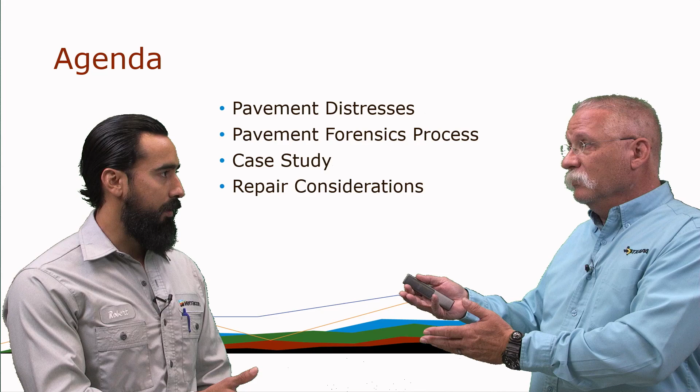The first thing I want to talk about is, anytime there's a pavement distress or you get asked to go do a forensics investigation, what do you do? You see a distress in the pavement, and it's easy for people to point out the hot mix, right, because it's at the surface. But we need to talk a little bit about the different pavement distresses, and then we can talk about the pavement forensics process.

I'm going to bring up a brief case study, and then at the end we can talk about the repair considerations. Awesome, let's get started.

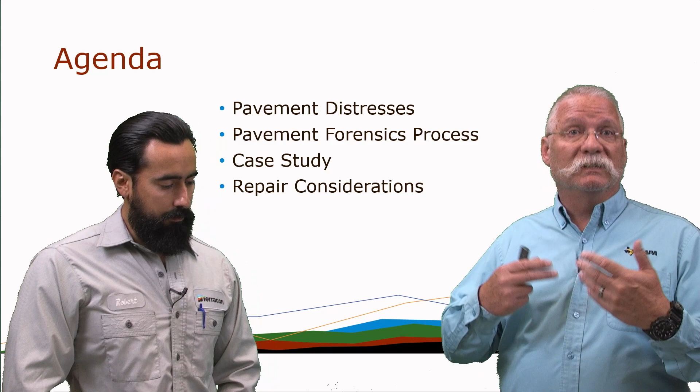And then sometimes, as I mentioned, it could be a volume change, or it could be a construction joint. As you mentioned earlier, sometimes we're trying to look for that smoking gun, but many times it's just several reasons. And to me, I think the key thing is to list them all out - list what you think could all be the issues. Then you start kicking stuff out, and you start looking at interactions - well, if this happened, this could happen.

Yes, and if my water was getting into the base, that could happen as well. As you start to define that out, you've got to start everything. One of the things I always look at, I start from right-of-way and look at everything that potentially could contribute to the issue. Whether I think it's an issue or not, I want to make a note of it. And then whether I'm out here on boots on the ground, or just looking at a photo like we are right now, I always look at the ditch.

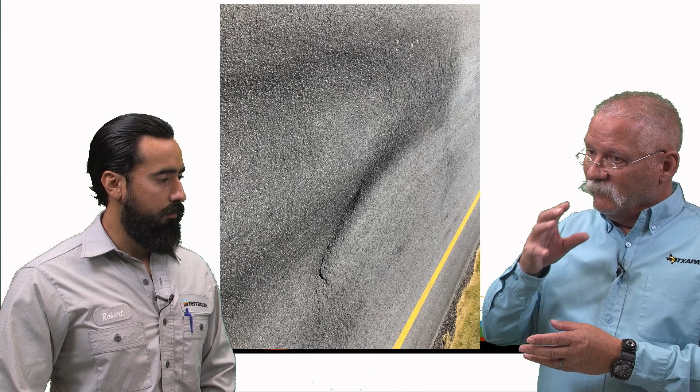Absolutely, and that's a big deal. TxDOT is looking at a shear bond strength test, trying to evaluate that—actually take a core through the pavement, then shear it right at the interface and measure the strength of that interface. They're still trying to figure out what that number needs to be. But we know there are very high shear stresses just a couple inches down, and if we put that high shear stress right at an interface, and we don't do a good job with that interface, then potentially that pavement isn't acting as one—it's acting as independent layers, and they're not going to be near as strong as if the whole thing acted as one.

So show me here what we've got. I wanted to bring up this picture because there's a couple of things going on. In general, this is stripping, but if you look over here, originally there was a crack right through here, and then it was sealed—you can see the seal coat right there. First of all, we need to be proactive with maintenance: as soon as we see a crack, seal it as soon as you can, because otherwise water gets in and you see the stripping issue right here. Once water gets into your pavement, it can cause all kinds of damage—it could be in your hot mix, or if it goes deeper, it can be in the base or the subgrade.

The next thing I want to talk about is once we get to that time where we have to do something about it. Say you've got your scheduled 2-inch mill and fill. Where are we placing that overlay on top of? Right on top of the failed section. We really need to be probably down here somewhere to resolve that issue.

So what may be in the book as the standard operating procedure, we still need to go out and put eyes on this, cut some holes, and take a look at what's going on. If the issue is deeper than what the book or standard practice says, we've got to think about this, because just taking off this 2 inches and putting 2 inches back, it's going to fail in a very short period of time. And now we've wasted even more money, more resources.

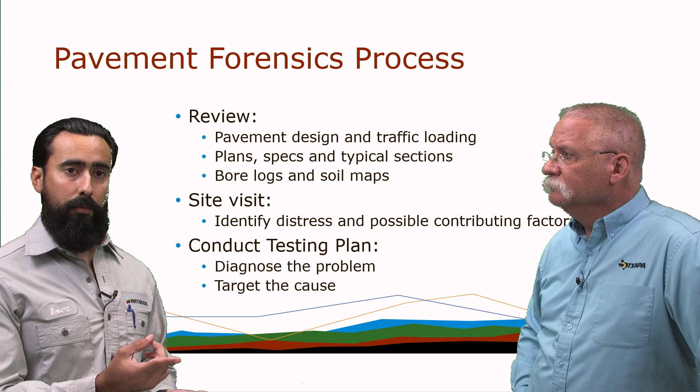There are 3 steps, and as you mentioned earlier, we need to diagnose. But first, starting with the review, there's 3 things we like to look at. The first is, is there a pavement design, an original pavement design, and an original traffic projection? Then any available plan specifications and typical sections. So if we have X number of inches of base, X number of inches of hot mix, we need to know that information before we go out there and validate what is out there. And then any available bore log soil maps, we need to make sure we know what we're sitting on top of. We have clay versus silt versus sand.

We need to know what we're sitting on top of. So if you know what's supposed to be there, then you go out and do some investigation, you can evaluate: here's what it was supposed to be, and here's what's actual. And if they're not the same, that's going to give you an indication of maybe that's why you're out there. We're after validating. This is what we have. What do we actually have?

I think the one other thing I'm glad you brought up, and we mentioned it already, is looking at the traffic loading. What was that original pavement design? Was it a 20-year design? Was it 3 million, 8 million, 10 million, 20 million?

We're seeing pavements now that have got 40, 60, 80, or 100 million ESALs on roads. So what's happened to that roadway in the last 10, 15, 20, 30 years? Have we just worn it out? It gets stressed, and eventually it gets too stressed and may just crack because it's not designed to carry that level of load anymore. I look at the amount of traffic increase all over the state. It's a challenge. We gotta be realists about it.

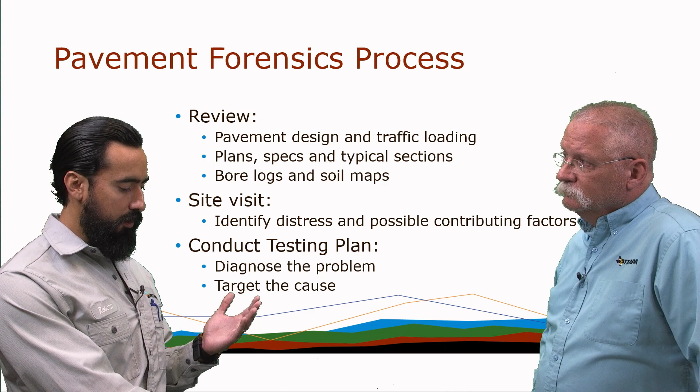So then you're going to go out on the site. Now that we have an idea of what we're dealing with, let's put some boots on the ground. And you mentioned earlier, let's look right-of-way and see if there's - you make up your list and start writing all the possible causes, and then based on that you diagnose the problem. Okay, I got the distress, I know approximately - I could tell maybe this is the cause, and then you go back to the drawing board and use your available tools to go out there and validate. So you need to diagnose the problem, targeting the cause, so you know how to fix it. Yeah, perfect, that makes perfect sense.

It's not a one size fits all, right? Well, the book says I gotta do this - well, it may not be that at all. If it says 2-inch mill and fill, you may need 4, you may need 1, or you may just need an overlay - just depending on what's going on and how well that pavement was constructed. We're getting better quality with our mixes every year, but we still have challenges moving ahead.

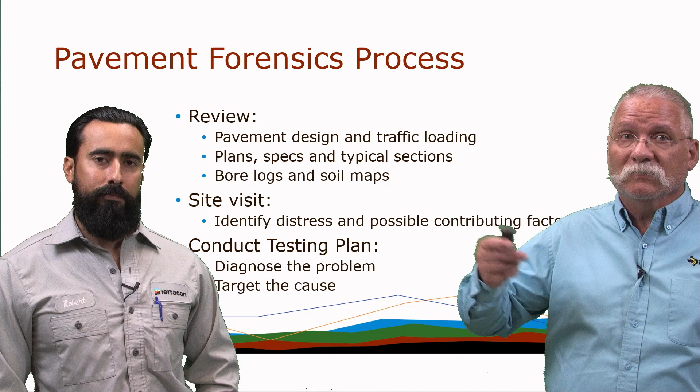So we've got FWD here - explain how this works. When we talk about the pavement forensics process, we have many available tools, and there's a few I like to use. One of them is FWD. So what you have is a trailer, a falling weight deflectometer. You have a load, it's a 9,000 pound load, going right back underneath right there. And you have a set of sensors sitting directly on top of the pavement. You pick up the load, drop it, and then you measure that pavement response. So that's just a quick indicator - W1, the first sensor, gives you an idea.

It's directly under right there, yes, that sensor gives you an indication of overall stiffness of that pavement. So that sensor alone, you can see consistency, and then when it goes up, something's going on.

Maybe that's the place where I need to look. Is there distress? What's happening there? And this is a quick, fast indicator. You drop it, maybe a minute per drop, and then you can do a number of drops over the pavement, and then you can go back and review. Now I have an idea of what the pavement is doing. Maybe I need to narrow down in this particular section.

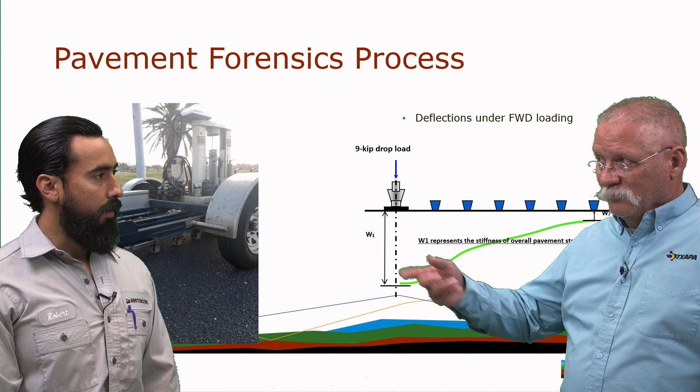Sometimes you can say okay, 80% of the roadway is fine, but I have a few sections where I need to look and see what the problem is, because it could be that you have two different types of repairs for that same roadway. And that's where you're going to get into your next steps.

Dynamic cone penetrometer. So now that you evaluate the roadway with the FWD, maybe you pick a control section where you know there's no distress, the deflection is what you expect, and then you see another location where you have a little bit of distress, the deflection goes up, and then you use this tool.

In this case, we like to drill a core and see how much hot mix we have. It's wet coring, so you wouldn't want moisture to affect the base, so we go a few inches and then drill an access hole to the top of the base, run the DCP, and you can just drop it down to get a stiffness in the hole, starting from the top of the base, but you've not damaged it with moisture.

You just take a shop vac and suck all the dirt out of it, something like that. With the hammer drill, we just drill the hole, and then right there we start running the DCP on top of the base, and then we start measuring the stiffness profile of the base and the subgrade.

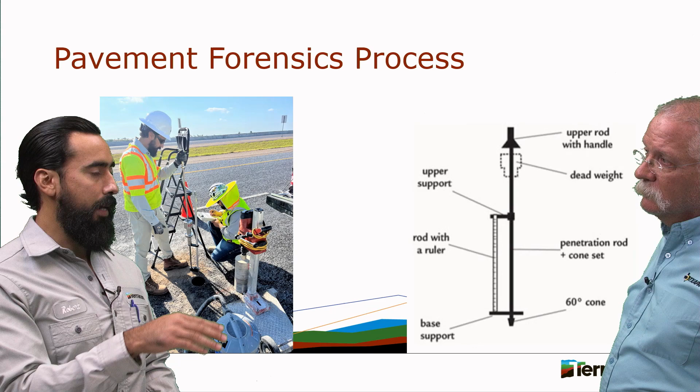You can estimate the base thickness, and then if there's a stabilized layer, sometimes you see that stiffness profile change very quickly. It probably takes longer to drill a hole than it does to run the test. If it's very stiff, it'll take a minute, but if it's soft, it'll go pretty quick.

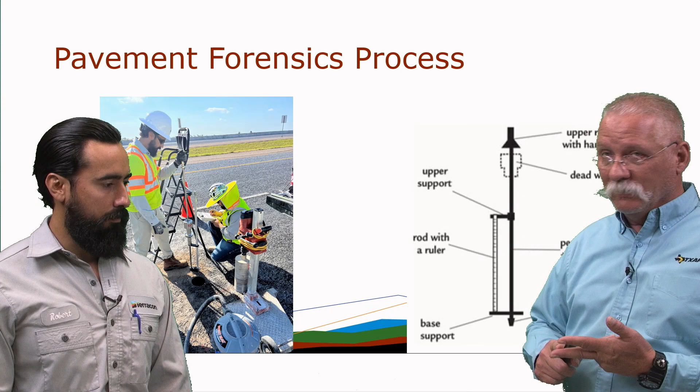So we got the FWD, the dynamic cone penetrometer, the DCP, and then we got good old coring. We're going to burn a hole in the pavement and see what it looks like. It's going to give us a sample of the mix.

And again, you showed that one core that had the stripping, it was very evident that there was a problem in that situation. But then we've got, what are we doing here, are you looking at the crack, are you crack mapping in this?

Yeah, we usually like to, once we drill a control, now we move on to a section like this where you have the distress, drill it, and then log it. I have inches of hot mix, it's this much thick, and then does the crack go through the hot mix, and we make our notes and then document it with a picture.

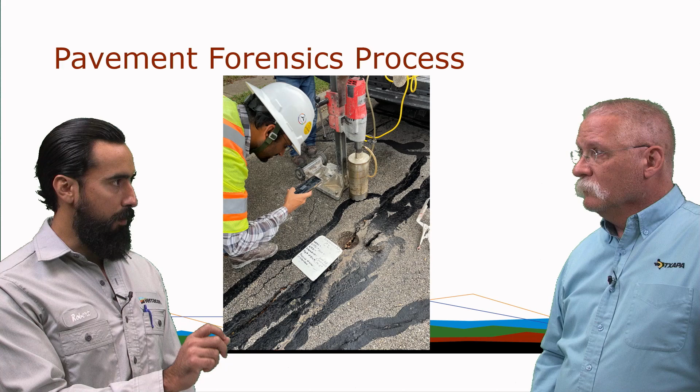Well, looks good. So then when you get back, then you've got all this stuff to look at. Now we know the tools, and TxDOT, when they do pavement design, they go off of the TxDOT pavement manual, and there's design values, or typical design modulus values for each of the layers.

Starting from the ground up, your subgrade should be between 8 to 20 KSI. Sometimes it's weaker than that, and then if you have a stabilized layer, that range is 30 to 45. Usually, if there's no stabilized layer and you have flex base on top of the subgrade, then that flex base is going to be affected by the subgrade.

If you have a weak subgrade, your base may not be as stiff, you can't use as strong a number. Usually that range is between 3 to 4 for your subgrade modulus, for the flexible base. So if your modulus is 10 KSI, you could then do 30 to 40, in that range.

And then obviously, this is all mix dependent. Different mixes have got different modulus. And so you've got what's in the pavement manual, and the Superpave is stronger than the dense graded. SMA and Superpave use the same set of moduluses.

And as the thickness of the layer goes up, you actually can increase modulus because it's now working kind of like what you're talking about down here. It's all working together a little bit better.

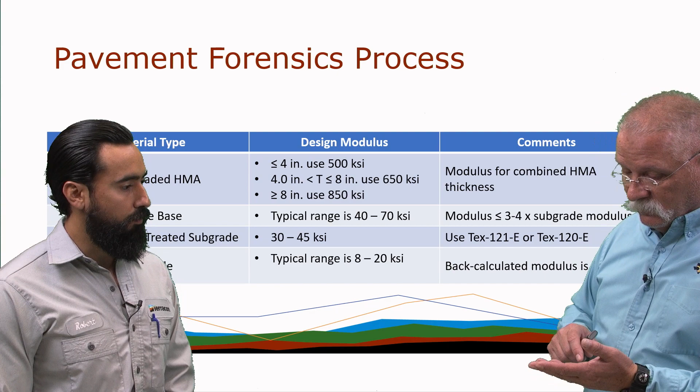So being a consultant, if you're working in Austin or down in Pharr, you've got to make sure you check the local SOP as well when you're putting your designs together, make sure they're kind of in concert within what range they want locally. Yes, that's the thing we do, we talk to the districts.

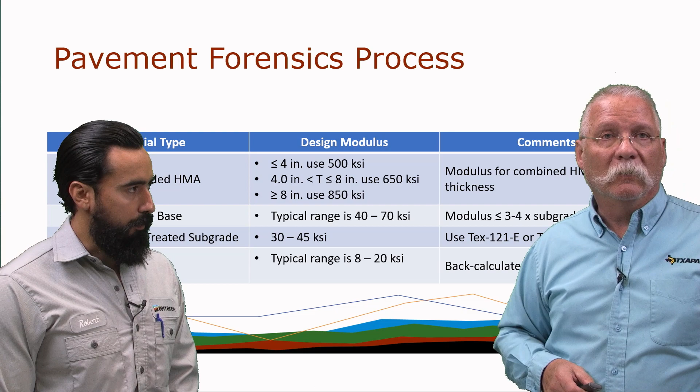Good deal. All right, so walk me through here. One of the things now that we've talked about FWD as a tool and typical values we use for design, there's a tool in FPS, it's the stress analysis tool. So what we can do with this tool is you get essentially a typical section. You say, okay, my subgrade is 8 KSI, then you got a lime treated layer, a flexible base, and a hot mix. Once you assign the thickness and the modulus value, then you can simulate what that deflection bowl is going to be. For this particular section, that deflection is approximately 17 mils.

So it's just a quick indicator. If I have a pavement that the plans say is this thick, I do the simulation, I'm going to expect 17 mils. So once you go out there, run FWD, you can see that consistency, okay, it's 17, 18, but when it doubles? You want 17 and you're getting 40, then what's going on?

Or sometimes it's lower, maybe we run into a full hot mix layer. Now that deflection is lower, but you got to look for certain things, not only what you expect, but the low and the high deflection, and then that's how you can target different ranges to see what's going on.

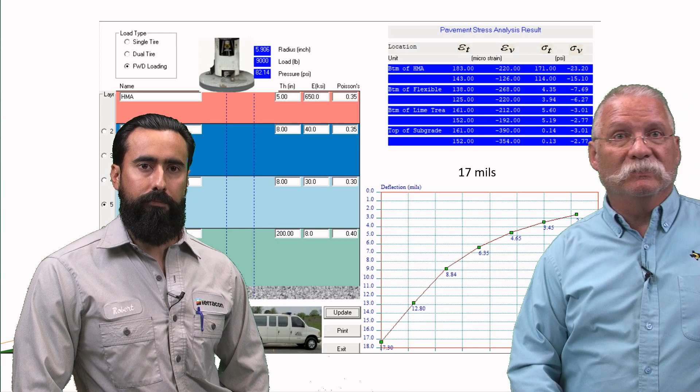That makes sense to you guys? Hopefully. So then you could go back and, if one of these was significantly different, or if you do some additional work, you find out that layer wasn't 5 inches thick, that's a great point. You can do that simulation and go out there as well, and hey, it was actually 7 inches thick or 4 inches thick. You'd go, well, that should change this deflection, right?

So then, the way I look at it, there ought to be a reason for the number. There ought to be some science that tells you. If you can evaluate those different lifts and the different materials, it ought to make sense. And if it doesn't make sense, then maybe one of my assumptions is off. Maybe they said it's got 12 inches of flex base, I'm not going to take your word for it, and then you go out and you go, well, this doesn't make sense.

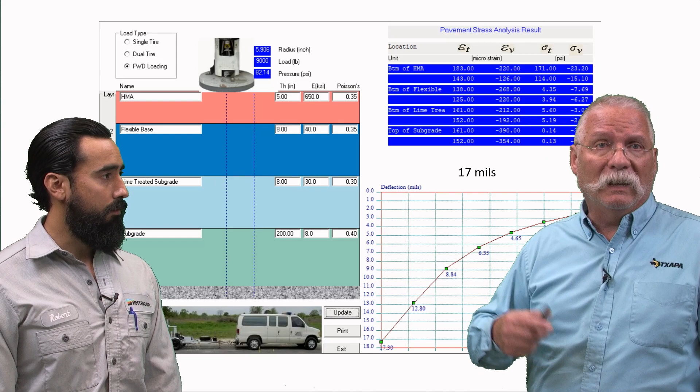You go out and there's 8 inches of flex base or something else like that, and you kind of go, well, okay, now I see why. Now I see why. Okay, that makes sense.

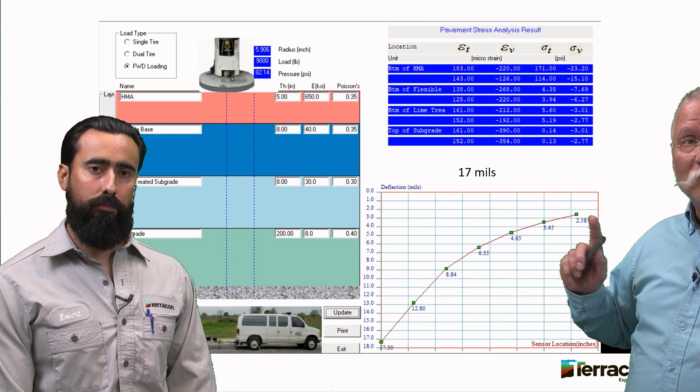So in FPS 21, you've got a stress analysis tool. If you're not using it, it's out there, you can use it, and you can go through and plug this in. I know I'm going to call you a pavement design geek, but with love, I know the shape, even the shape of this curve makes a difference in getting into the details there.

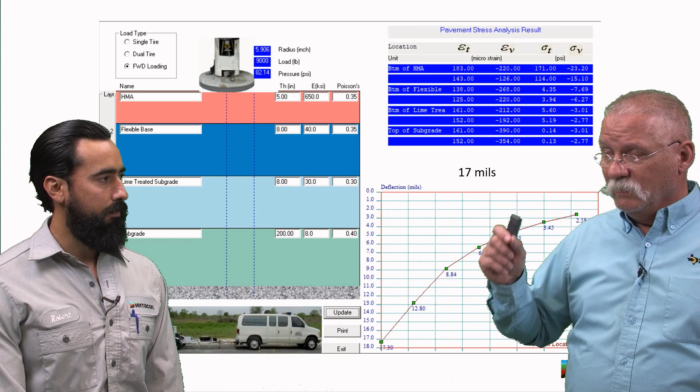So now we've got, this looks like we've got a pavement that you've actually done some testing on. This is your results. Yes.

So as we mentioned, now that I expect this deflection, I go out there, I set my control. I want to see what that looks like. And what you have right here is just an example of the way I like to plot that DCP.

So I plot it in layers, starting right here. That's the bottom of the hot mix, or top of the base. About 7 inches of asphalt. And now we're testing below that.

You start dropping the hammer and start measuring that stiffness profile, and then you see a change right there. That's when you hit your stabilized subgrade layer, and then right here, that's where you hit that natural subgrade. So for this one, there's formulas in the pavement design manual.

Boom, boom, boom, and then go like that, and then you're kind of in a new layer, then boom, boom, boom, and then it'll drop some more. And it'll tell you, obviously you can measure thickness as well, and also measuring that strength of that material.

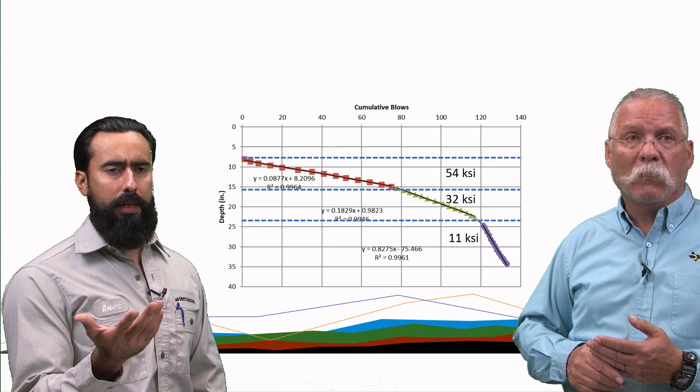You estimate the stiffness, so that helps, right? You line this up. And sometimes, that's where you mentioned it earlier, so are we missing a layer? Are we missing thickness? This is a quick indicator of where the problem is.

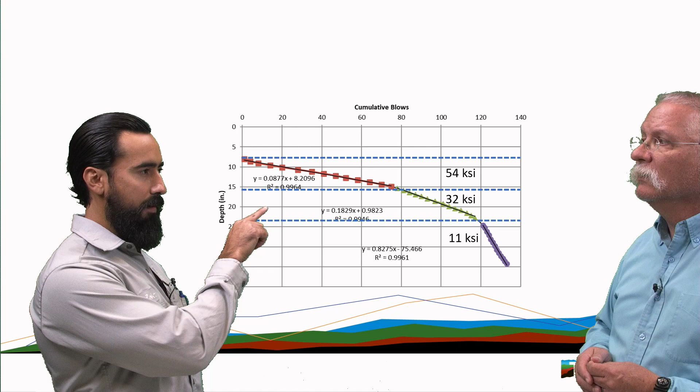Sometimes you do forensics on a cracked pavement, you get the moisture in there, and maybe it's just affecting the top of the base, so you don't need a full rehab, and the stiffness profile is going to show it. You may have a couple inches that are weak, but then you're sitting on solid base, so I just got to get below that weak layer.

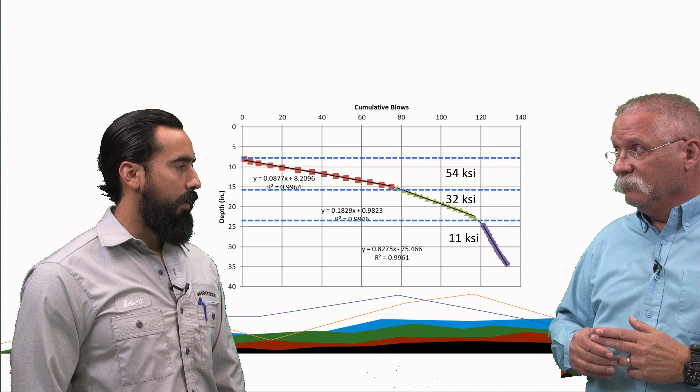Yes, and then from then design up, go and keep that, keep that the bottom if you can. Okay, and then just rework. So it helps me isolate how deep I need to go. Okay, that makes sense.

In this case, we're assuming that it was in the surface layer. So what we did is we drilled a few cores, focusing on the wheel paths, and then in between the wheel paths, and then out, and then in the wheel path again. And then we line them all up, and then we try to see, okay, can we isolate where that problem is?

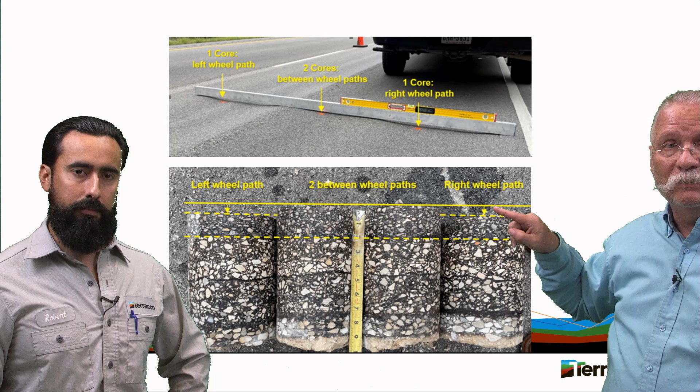So if I was going to cut a core right there, I can measure down. We're half inch below my line, and now I can actually see that. And sometimes it's not necessarily declining much, but sometimes it's kind of shoving up in that area, so you got to look at the material.

This might be good if we wanted to analyze this mix a little bit to see if it might have too much asphalt in it, or maybe just a wrong mix or wrong binder, those kinds of things that would cause it to have more of that plastic flow.

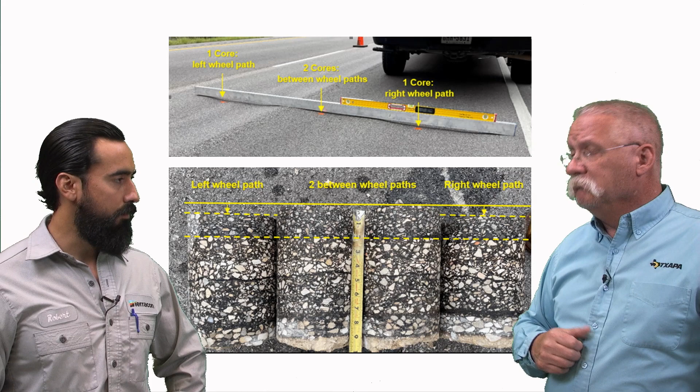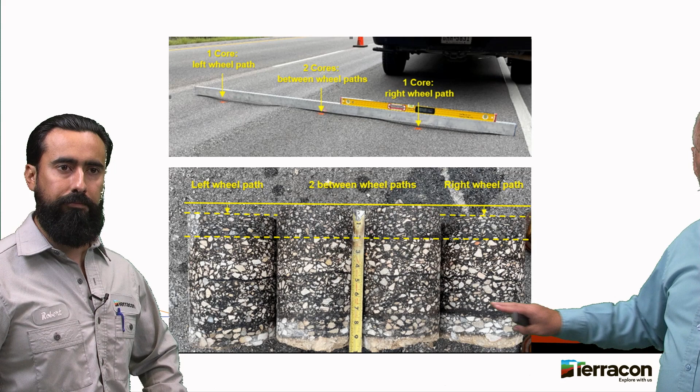Okay, good idea, great slide. I love spanning the full width, I love measuring the slope, big fan of that. But again, you look down here, you can see pretty much where those layers are, all independently together. They're together, so there's bond, and you can actually see some base sticking to the bottom of the hot mix. So there was bond even between the hot mix and the base.

I think we can't underestimate that, of how we want that whole thing to work as one big monolithic structure, not a bunch of independent layers.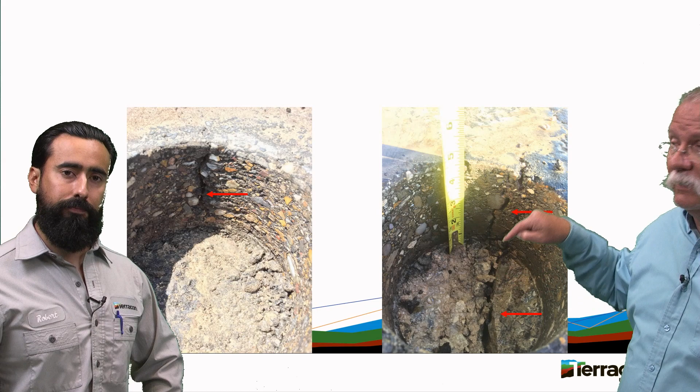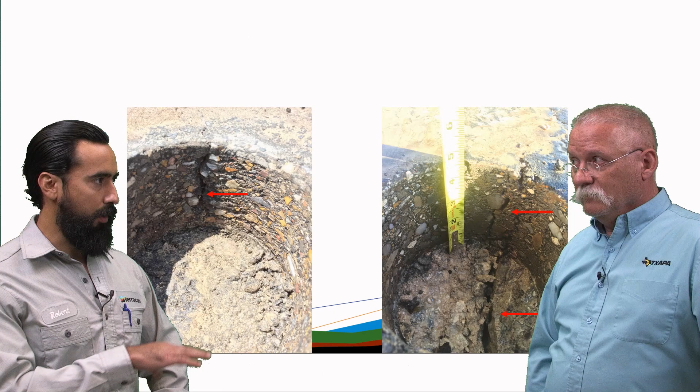And then on the other side, sometimes the problem is deeper. So it's cracked through here, and it's actually going further down. Now we got bigger, now we got more decisions to make. Yes, now we gotta diagnose. Is it in the base? Does it go down to the subgrade? Try to make sure you isolate how deep that crack goes, and then lengthwise.

From where to where, so I can focus. Okay, this section needs a rehab. But we're using good science, we're using good values. We're not just going 2 inches or whatever it is—we're trying to fix the problem.

Okay, again you got another slide here, some more situations. This one is actually cracked through the entire multiple layers here. This one, nothing. So in this case, other than the stripping, right? So it's not cracked, but you see the first picture.

You drill a core, you find the stripping. You want to make sure, if you're going to schedule something for that project, how deep is my problem? Now that you look at the core pictures, you have the crack going through the strip layer, and then we drill the core in between the wheel paths where there's no crack, so we can get a full core, and then you can use that as a reference.

Okay, my strip layer goes that deep, so even if I did a resurfacing, maybe I get rid of part of the crack, but then I'm sitting on stripping. So let's make sure we go deep enough to get rid of both the cracking and the stripping.

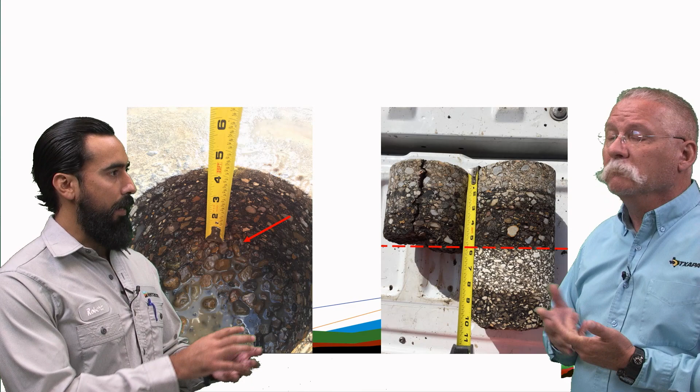So just to make sure everybody's up to speed—what's stripping to you? Stripping is when the asphalt loses its ability to bind to the aggregates in the mixture. Okay, fair. For some it could be a lot of time. Typically moisture is one of the issues with stripping that we're trying to resolve.

So if we have those cracks and we don't seal them, water can get in, water can't get out, you get 30 days at 100 degrees, that can kind of start causing that material to heat up and cause a problem in there.

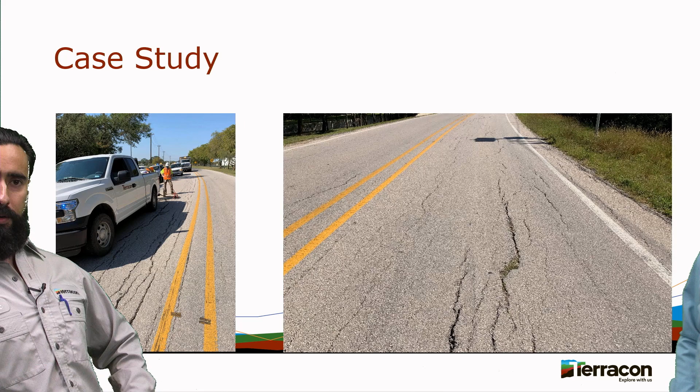So again, challenges. Then you got another case study here. Brief case study here—we were asked to look at a section of pavement, and as you can see, there's a lot of longitudinal cracks in that pavement. This is just different parts of that pavement.

Same roadway, same section, just different sections of that stretch. It was isolated, and once you moved out of that distressed area, everything looked fine. So we did some soil surveys, and the first thing that stands out is the PI of the subgrade within that area was higher than the rest.

So that's one thing. And then the road was probably widened at one point in time, maybe they added another lane, so I'm just trying to figure out how that could happen. Well, possibly, yeah, sometimes it's just the soil. You can have one project, sometimes it's clay, silt, just the nature of the subgrade. Sometimes it just varies throughout a stretch.

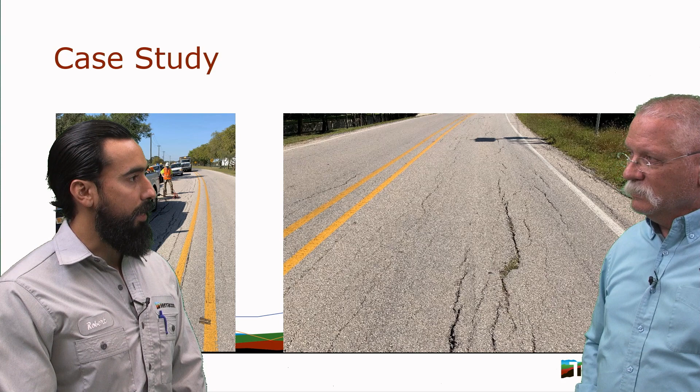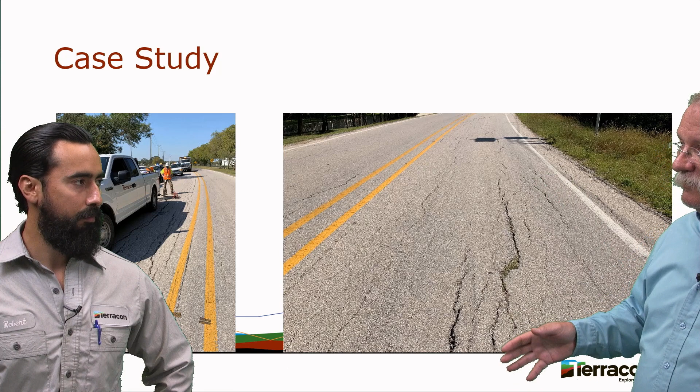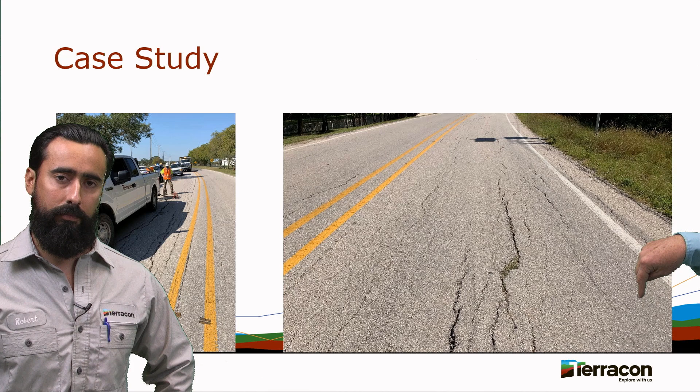I always look when I see these kinds of pictures, I look out here and I see a shoulder, and water cannot get off this pavement. That to me is always a red flag, because if I've got high PI clays down below and water that can't get off the pavement into the ditch line, that means the water is going to sit right in there and go probably down if it can. If I stack enough water up there, that would exaggerate and make the situation worse. Now I'm forcing water in and out. So again, watch your drainage.

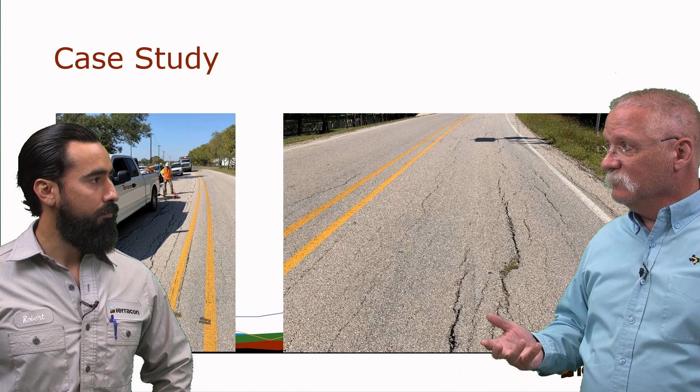This is probably not sexy, but it's something we've got to keep an eye on. So let's keep going here. We picked a couple of locations to core. We got core 1 that was outside of the distress.

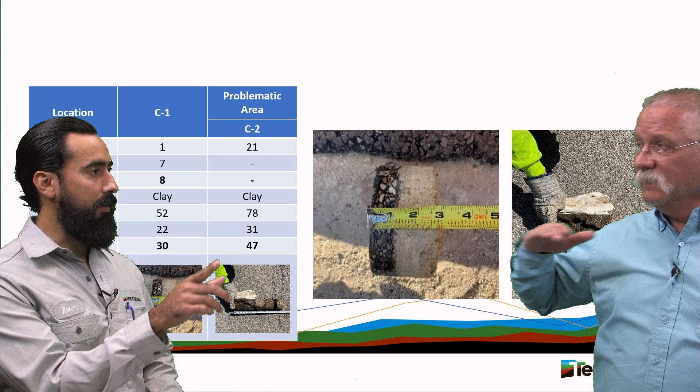One of the things we have, if I move out, right here you've got the hot mix layer of core 1, there's only an inch of asphalt and then 7 inches of base, over 30 PI clay, and it's doing fine. But you move to the other one right here, there's 21 inches of mix, cracked all the way down, no base, and it's sitting on 47 PI clay. So they just kept stacking layer and layer, and it just kept sinking.

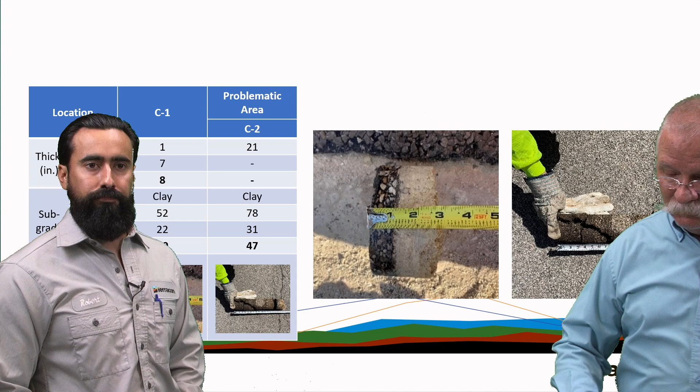Those maintenance forces are out there frequently doing mill and fill level ups, and you don't really get to the issue. You need to fix the drainage. Right, right, gotcha, good.

So let's look at our considerations as we wrap up here. As we discussed, you want to go out there, identify the causes. You need to make sure you identify the causes so that you know how to properly fix it. And then, when we do forensics, it's always about lessons learned. So how do you prevent that in the future? We know that happened here. Now we know, let's fix it. Don't do that in the future, or this is the way we mitigate that issue going forward.

Going back to our original discussion, once you see something going on, it's easy to point at the hot mix. But is it in the hot mix? Is it in the base? Or is it in the subgrade? Right, gotcha, drainage.

Critical, right. So a couple of things that are critical: your foundation, what are we sitting on top of? Is it clay? Is it rock? How stiff or how moisture susceptible is it? And then drainage, right, are we keeping water out? Yeah, and then we've got these other options.

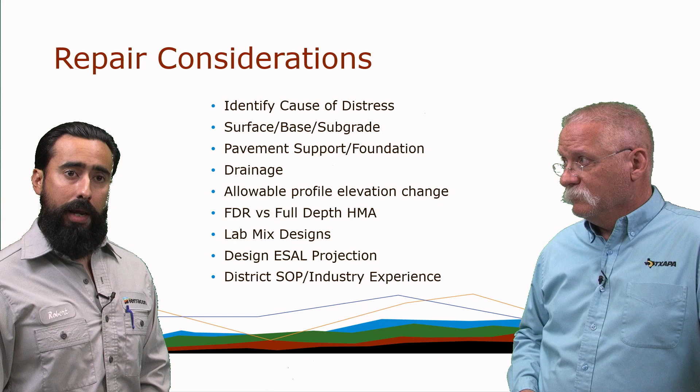And then you've got other considerations. Maybe in some districts you can't raise the profile, you're stuck, right, you can't go any higher. So maybe you need to do a mill and do a repair and then go back to that same elevation.

There's just many considerations. It's not as easy as 'let's do this, move on.' You also got to think about traffic control, industry experience in that area, district standard operating procedures before you come up with a good solution.

I've seen situations where you're fixed on elevation, but you got to beef the pavement up. So they actually take out some of the base and come back and put a higher type asphalt in there. Structurally, you end up with the same elevation, but the structure itself is stronger. So there's another option if you're limited by a bridge, an overhead, or don't want to replace all the curb, or some other situation.

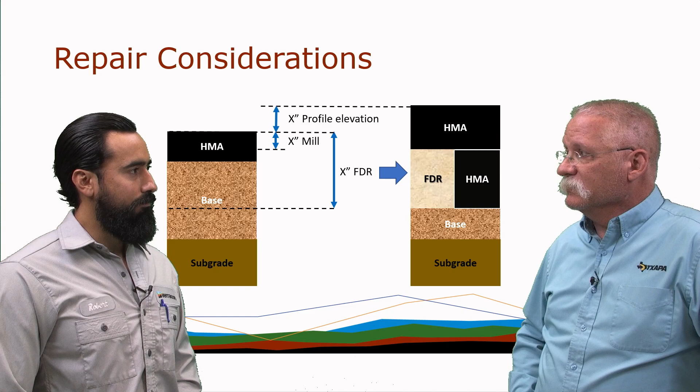That makes a lot of sense. So we are about out of time—I look at the clock and go, man, this has gone fast. It always does. Always great to have you in here.